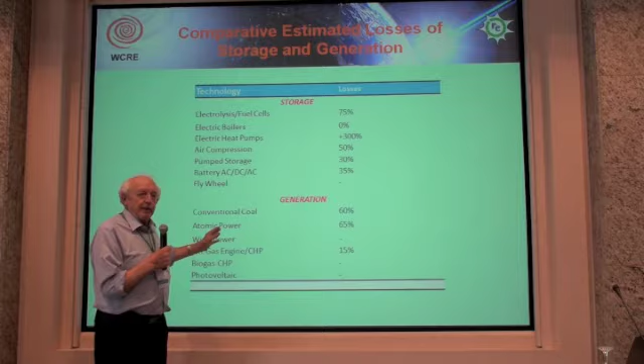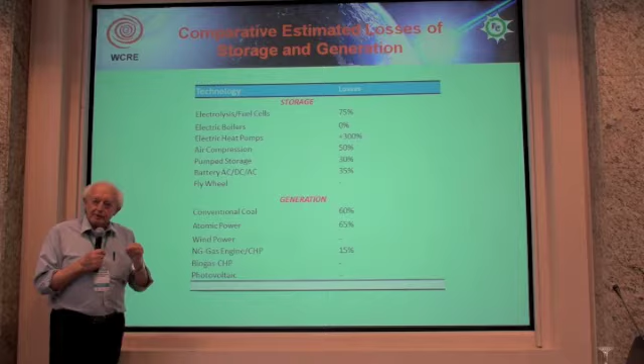Coal and atomic energy cannot be used. Countries that focus on large shares of wind energy could not use coal and atomic power in the future because they don't match well in a supply system. So it has to be some kind of decentralized, small-scale solutions that can respond very quickly, or some storage systems that also can respond quickly.

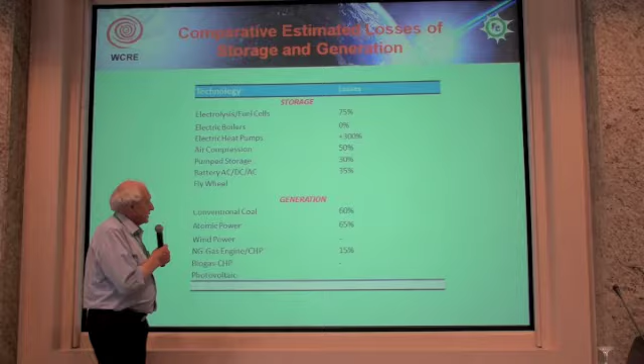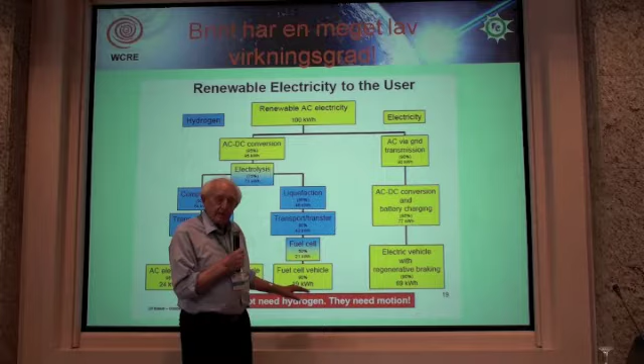Next one. So just this point on hydrogen, which is mentioned quite often here. This is Ulf Bossel showing this one. It's a graph telling that you start with 100, you have 24 left as usable energy. If you liquefy the hydrogen, you even have only 19% left. So I think we should forget about hydrogen.

It's also very costly, but we have moderate losses, only 30%, when you take it through the battery charging system. This is why the electric car, the electric vehicle, electrical equipment using batteries has much better opportunities in terms of efficiency than the hydrogen-based ones have.

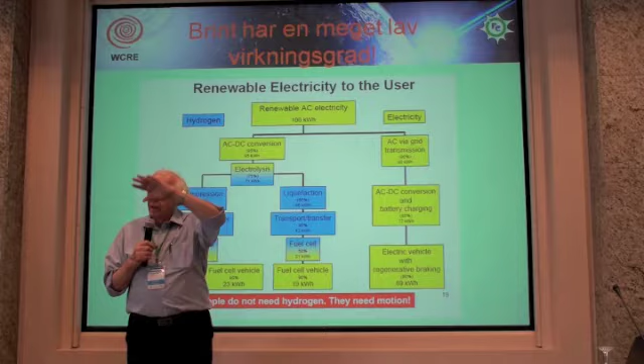There was a hydrogen wave some years ago. I think these figures here, well, I rely on what Bossel is bringing here, but if you look at the various solutions, it is multiplying up here, and that brings these low efficiencies.

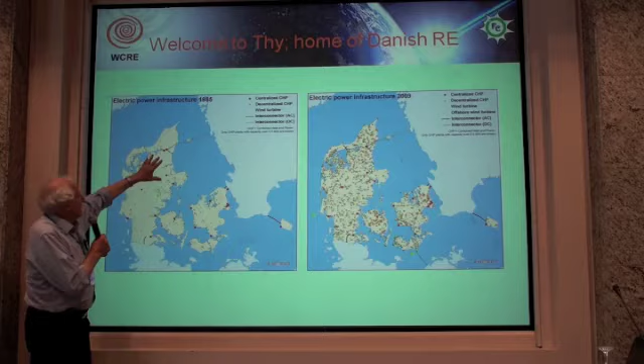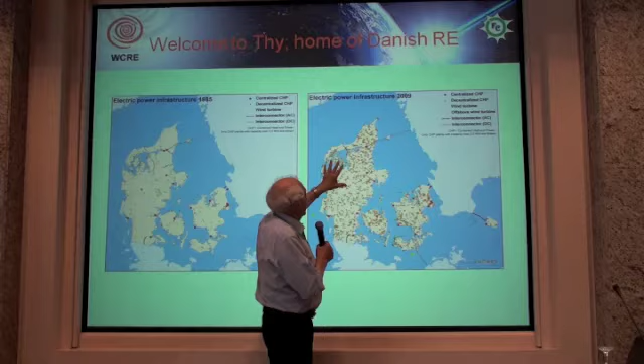Thank you. Okay, the next step, that is integration of wind and CHP. And next one. We see here a map of how this is today possible to do in Denmark. This is a map from 1985 where we see we have a few big power stations. This is 30, 25 years later, where we still have the big ones. But besides that, we have 3,000 wind turbines and we have 700 combined heat and power stations.

This makes a change, and this means now we have a system where wind and combined heat and power can be well combined. This would not have been possible at that time. So countries that do not have a big share of combined heat and power do not have the opportunities to match wind and combined heat and power like we have in this system. This is also why I see combined heat and power, combined heat and cooling, is also a part of the solution for the future.

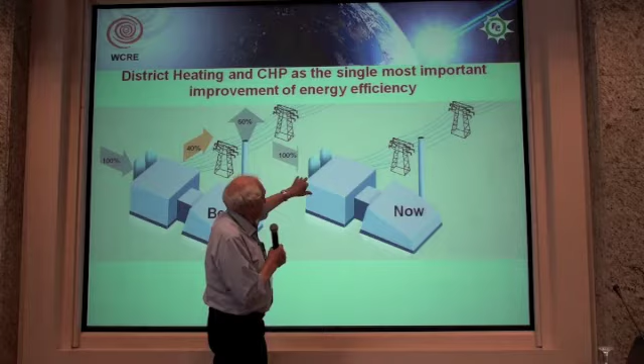Just take this one here. We see this is a conventional power station. Oh, next one. 100% fuel is fed into here, 40% goes to the grid - then it's a good system - and 60 goes here. The next one, 100 in here, and 40 goes here, and 50 goes to the heating, so it could be cooling also, and 10% goes here. This should be the standard everywhere. But our normal power systems are that way, of course very primitive, and are not belonging to the future.

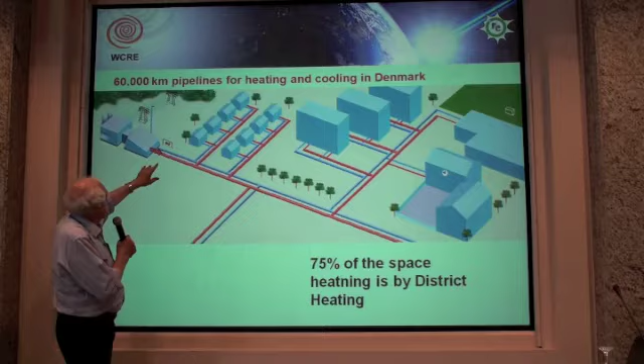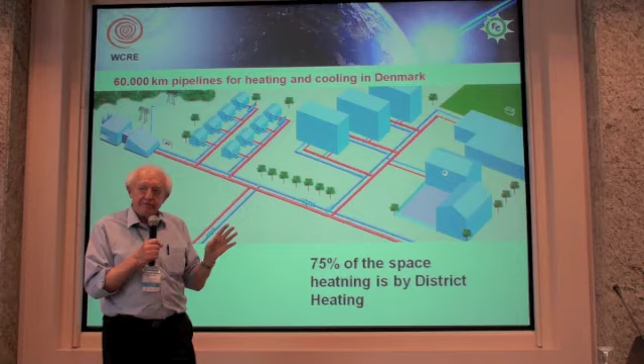But that's what's still being built in most parts of the world. But let's go to the next. This is then with the district heating or district cooling, just press. We see how the water flows to the houses and the water flows back, and it can be for cooling, it can be for heating. In this way, we have a total of 85-90% efficiency in the system: 40% electricity, around 50% for heating and cooling.

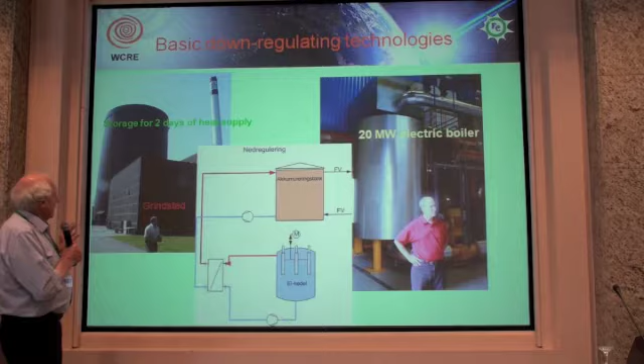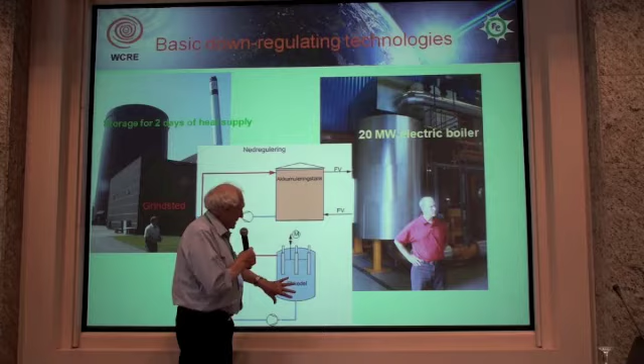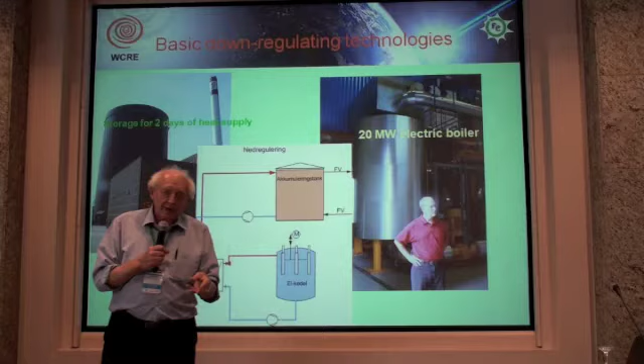And now we come to the new point. What is new here is that when we have this surplus wind, we have to dispose of it in some way or another. That is to supply that to this system here through an electric boiler, which is then through a heat exchanger delivering this to the heating system. And that means in the periods where there is no wind, then this is running on the gas engine - you save your use of fossil fuels.

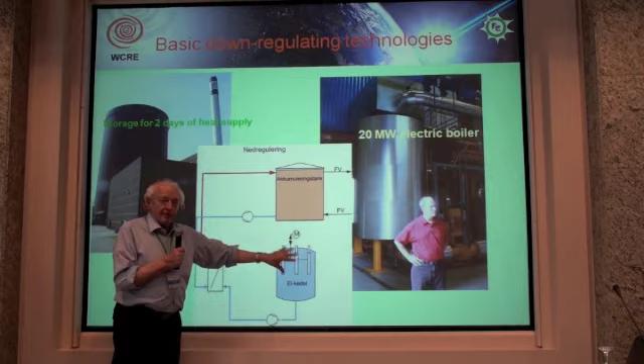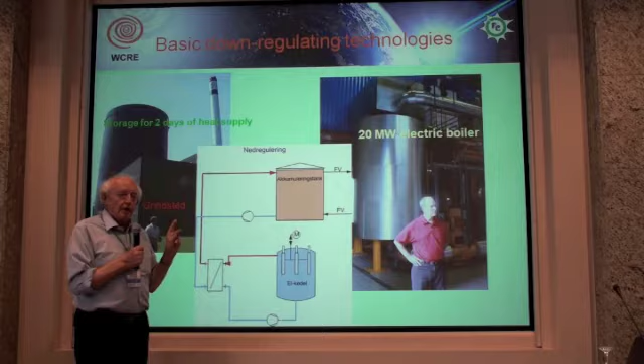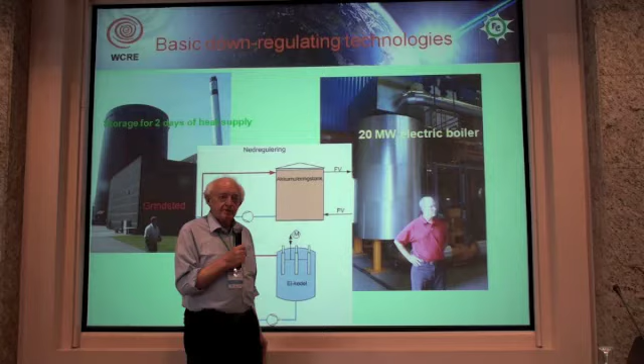But when you have the wind, this one takes over, and you can also fill up this big storage tank here, which is hot water. Hot water is the cheapest storage of all you can have - you cannot find a cheaper one. And you have storage there for a couple of days, depending on the season of the year - can be from 1 day up to 4 days. The equipment needed here is this electric boiler. It's the cheapest of all ways you can convert wind power.

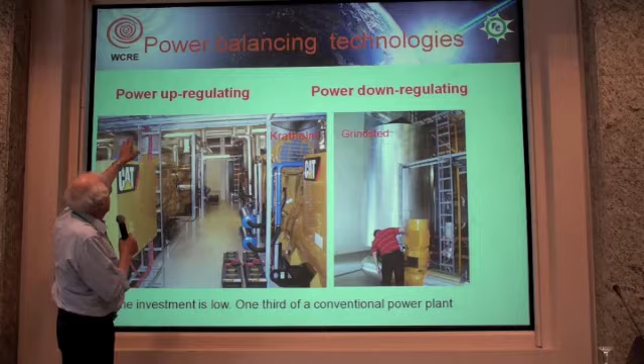Here you see an example of the system, with new terminology we will be facing in the coming years. This is power balancing technologies, and this is for upregulating.

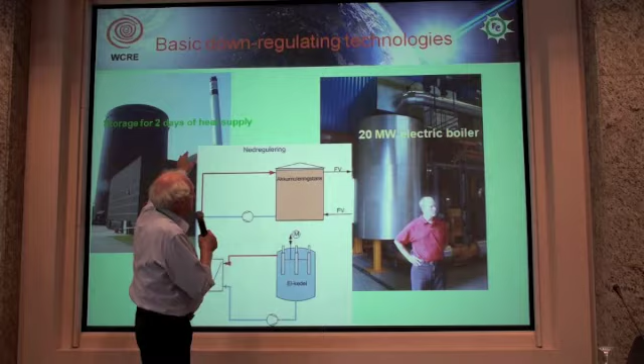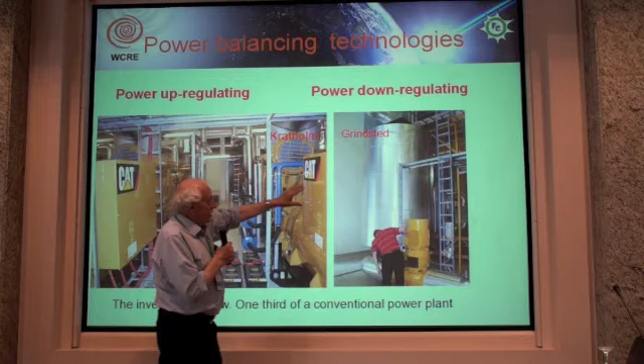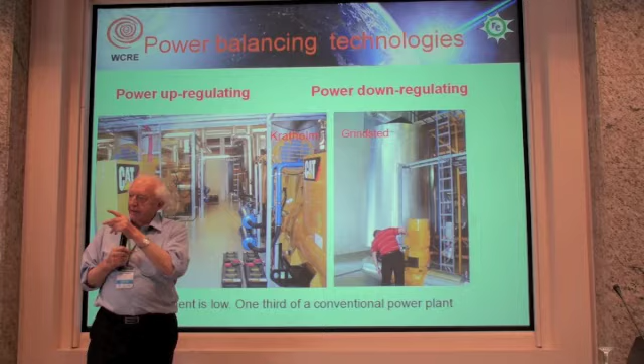We need power upregulating and power downregulating. When there's too much wind in the system, we need downregulating, replacing fossil fuels. When we have too little wind, we need cheap equipment with fast response time for upregulating, using diesel or gas engines. But as we heard in the presentation before, with high shares of wind this will run less and less. If we increase the share of wind, this will be less and less needed. But it must be there because we cannot base the system on wind alone or solar alone.

This is a system we have at my center at home, where we have three sources for power: a wind turbine, solar, and combined heat and power, plus a wood pellet stove and an electric boiler.

In a normal system, we would just feed the power to the grid. But in this case here, we have a power flow control. This means we take the wind power through thyristors to the electric boiler, so we are not selling, not buying. It's actually the same as we saw in the bigger scale systems as well.

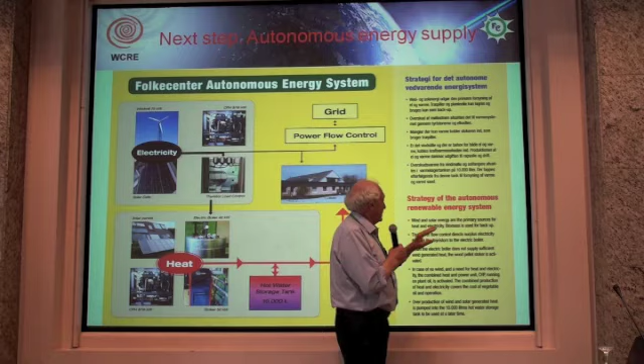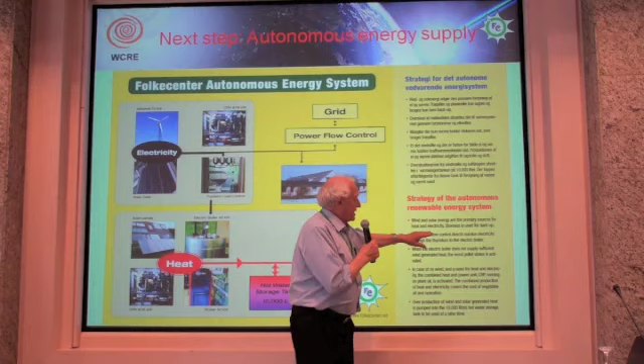In this system we have gone a step further, saying that wind and solar are the primary sources of heat and electricity, and biomass is used for backup. This means biomass, as we discussed yesterday, should not be used when there's solar and wind, because solar and wind are in principle unlimited resources, whereas biomass will be limited. So the biomass in this case is also a storage item.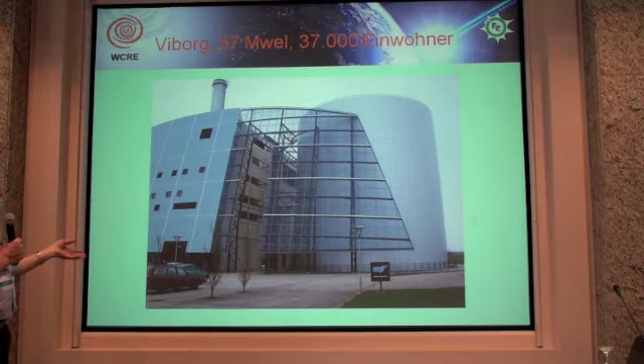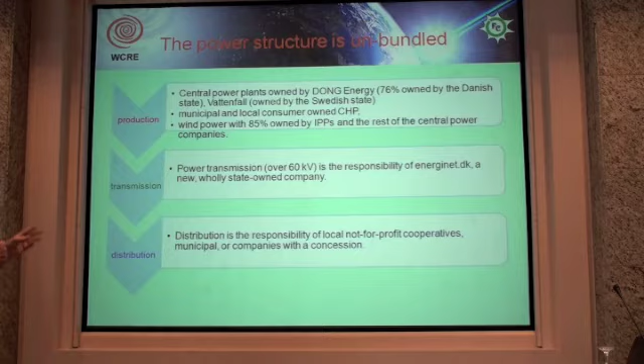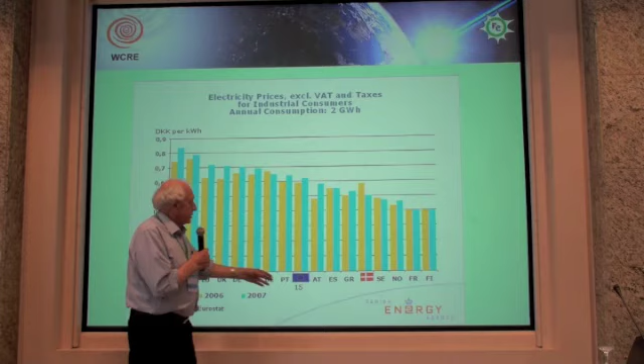This system as a whole is not leading to high prices, on the contrary. This is the EU average, this is the Danish price, and these are other countries with the highest price in Europe - that's Ireland and Italy, using old-fashioned conventional condensation steam generation technologies. Germany we have here. So this mixture of small-scale systems we have in Denmark has also resulted in low prices, in contrast to what is often mentioned. Good, next one.